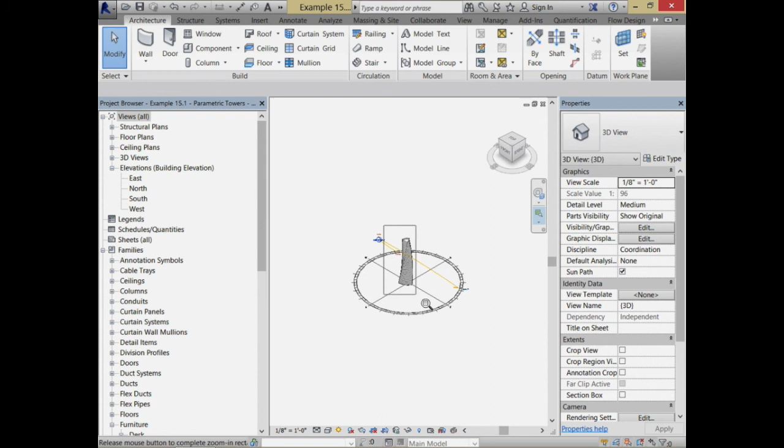So all I really have here is my big conceptual mass. This conceptual mass is divided into a whole series of mass floors. That won't be critical for what we're about to do, but how we did that was just kind of bring in the conceptual mass. We have a whole bunch of different floor levels assigned, and in that conceptual mass, go back over there again.

We've chosen it and just said, let's go ahead and break it into mass floors, where we've checked all the different floor levels. The reason I like to check all the different floor levels is that even if the tower is not as high as the floor levels, if the tower grows to be that high, those new floors will be added automatically. So I could have 160 of them in here, or something like that. Many of them would have an area of 0, but checking them all off allows that if the tower grows or shrinks, it'll go through and have the appropriate number of floor levels.

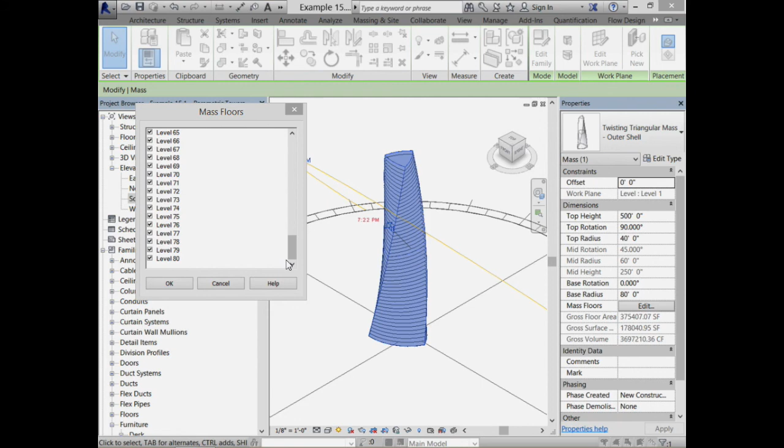Okay, so far we just have this tower, nothing too special going on there. Let's go ahead and just take a look at it. Now, as we were looking at this tower, there were a couple of surfaces that were very interesting to us.

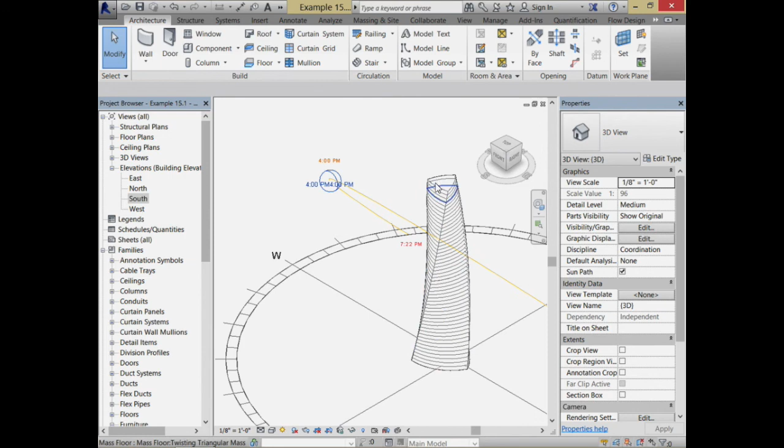There were these, what I considered to be the outer faces of the tower. So let me see if I can grab it here. I'm tabbing, let's see if I can do it down here. That's so sad, I'm getting all of the mass floors. I can grab it on the side.

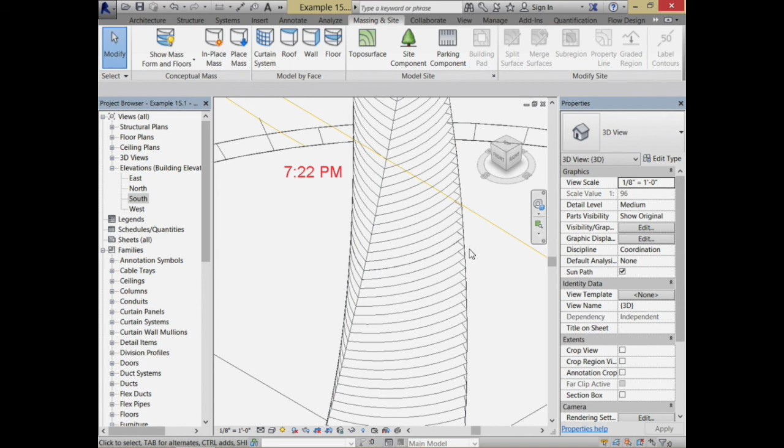Making sure it's all turned on. I don't think it is. That should be okay there, it's still there. Might have to open it to grab the individual face. Anyway, I want to grab those faces, the front face, the side face. There's 3 of them around the outside.

Okay, so here's what we're going to do. We're going to go through and open up Dynamo and take a look at the way we did it last time, and we will do it a little bit differently.

If you can, please open up in the Dynamo examples, go to session 15, and within there, grab example 15.1. We'll take a look at that. I'm going to go for the start, we'll kind of build this up organically.

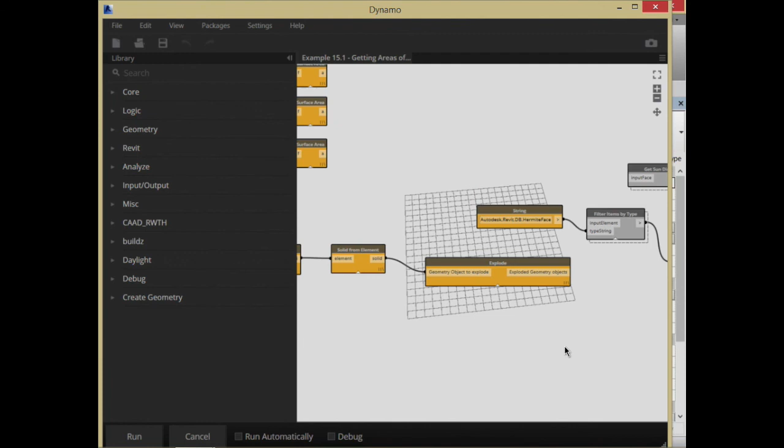Kind of push that over, push that over a little bit so you can see it all on the screen. Drag that over. Okay, so we have this whole notion of really choosing these individual faces, face 1, 2, and 3.

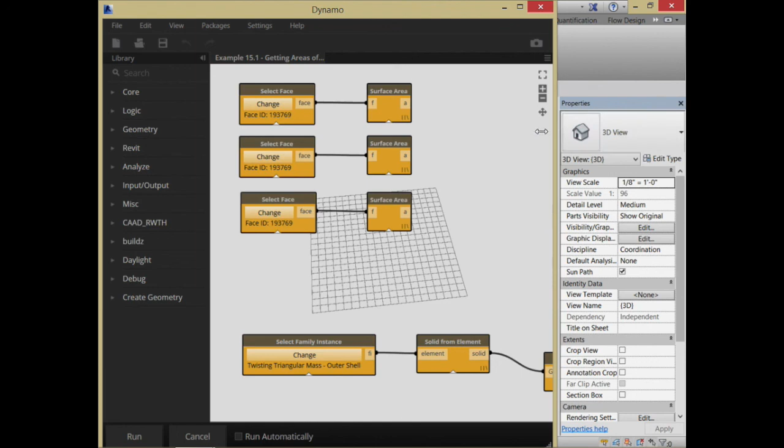Notice it gives you the same face ID, it actually is the 3 separate faces. I kind of think of it as a bug, because I would like those to actually be 3 different numbers. But let me push that over and see if we can show you what I did. What I did was I chose to change the face.

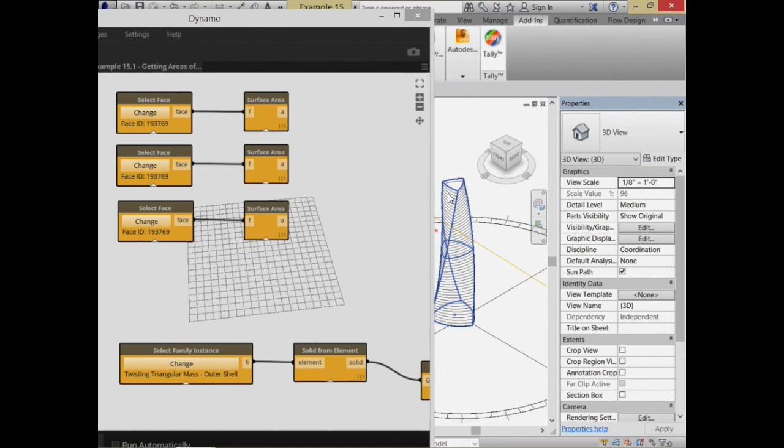That's not what I want to do. Let me change the face. I'm going to grab that front face. Change this face, I'll grab that one. Change that face, I'll grab the one behind us.

Those actually have about the same surface area right now because this is a very regular tower. But if it was something a little bit different, it would hopefully be 3 different areas.

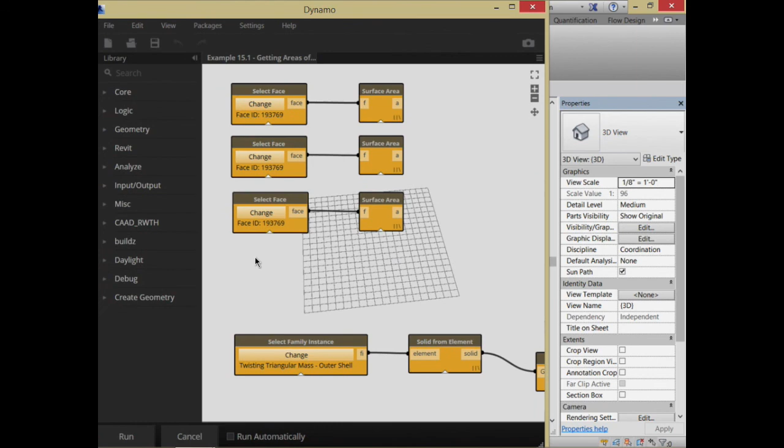In terms of running some very basic analysis on this, there's actually a surface area function, and it can report the surface area on an individual face. There's about 53,757 square feet on each of those different faces, and right now they're all even. There's not a whole lot of difference there.

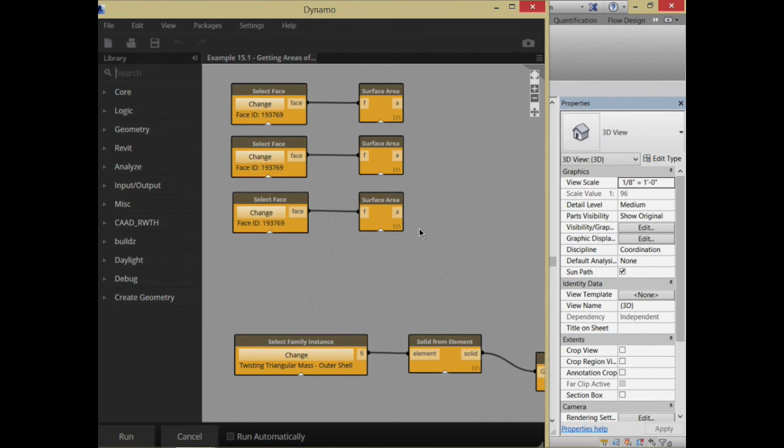What I want to think about is can I go through and grab those faces, those 3 faces or 4 faces or as many faces as there are on the structure, using the same sort of scripting. So what I can do is set up a series of logic that looks something like this.

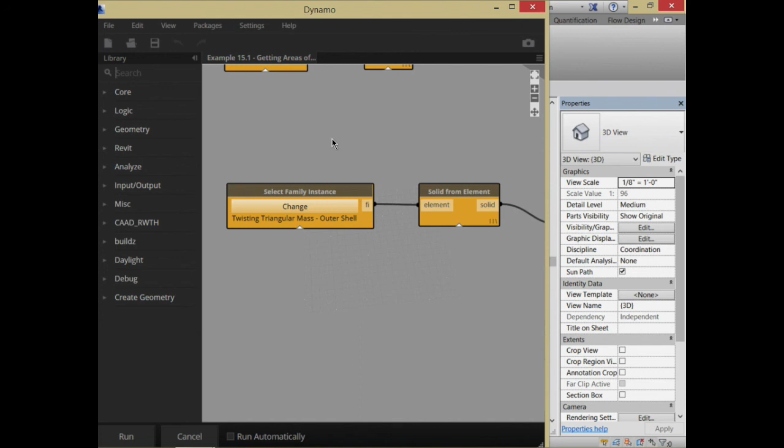It all starts with just selecting a family instance, and from that instance, that's a piece of Revit geometry. What we want to do is create a piece of solid geometry from that, something that's back in the Dynamo environment as opposed to the Revit environment. So we're going to take that family instance and convert it into what's considered a Revit or Dynamo solid, a geometric solid. And from that, go ahead and pull out some faces.

Let's just see what this looks like. As we choose that triangular mass, the result of the solid from element is just a solid representing that piece of geometry.

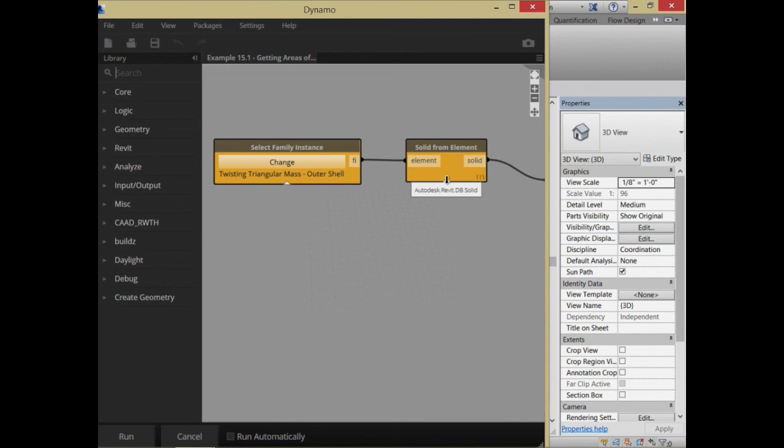We could actually use a function called explode. Explode is all about just basically taking some sort of geometry object and exploding it. If you give it a solid, it'll explode it into a series of faces. If you give it a list of faces, it'll give you the edges around that face. So it's kind of a useful decomposition node.

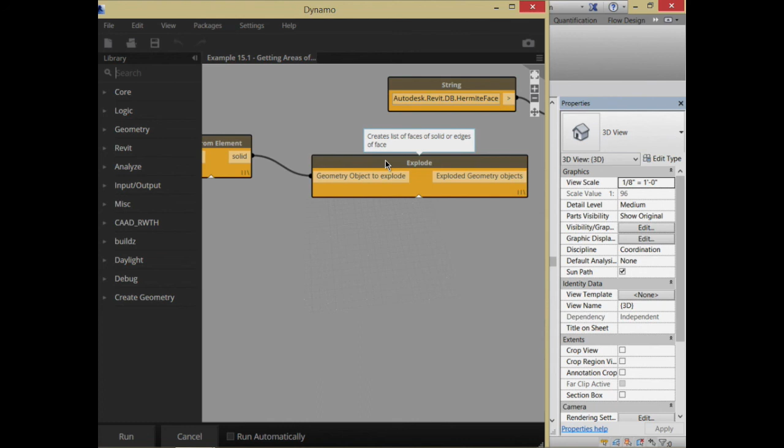So what it'll do is, if we feed it that solid, you'll see that it gives us a series of different faces here. Let's see what it gives us: there is a planar face, a Hermite face, a Hermite face, a planar face, and a Hermite face.

The planar faces are the top and bottom - those are things that don't have any curvature to them. The Hermite faces are the ones that are actually formed in that curvaceous kind of structure.

For me, it's going to be fairly easy using this specific object to go through and isolate which are the sides versus which are the top and bottom. If I had another structure that was all planar faces, it would be a little harder to figure out really what is the top and the bottom - we might have to do something else to filter those out.

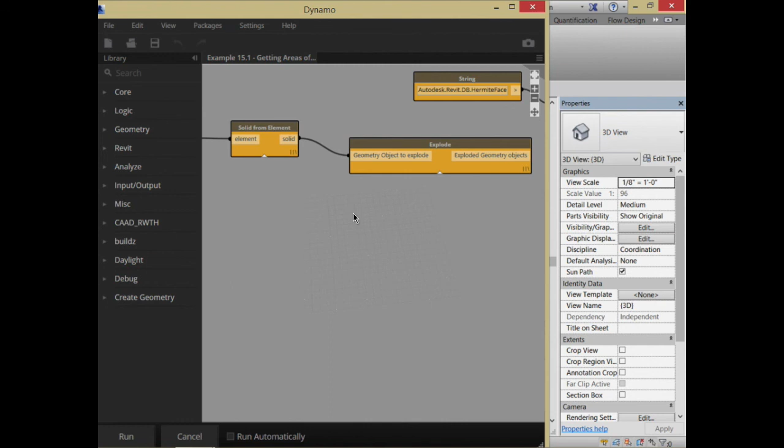The idea is, what we'd love to do is take this list of 5 different objects here, and go through and filter it down so only the Hermite faces are considered - so take 5, get it down to 3. That's really the next step in all this.

We have some things that we would like to filter, and we could use something called the filter in function. Filter in says we're going to have a function that goes through and sets some criteria, and if it's true, it'll include it. Filter out would be, if it's true, knock it out of the list. There's actually one where filter, whether true or false, will make you 2 different lists - the list if true and the list if false. So you can use filtering to basically, based on a criteria, include, exclude, or divide. That's what the filter in function is all about.

Now the filter in function really takes just a whole sequence of different objects that you're going to give it to take a look at. And then it looks for something it calls a predicate, which is really just a function which is always going to evaluate to true or false. Let's take a look at that.

We'll grab this, take those geometry objects, all 5 of those, and bring those in to filter them in. In terms of what the predicate looks like, let's take a look at this function. We have different sorts of functions we can set up to filter by whatever we want. In this case, I want to filter just by the type of object - I want to get the planar faces versus the Hermite faces. So filter items by type is a custom node. Let's take a look at it.

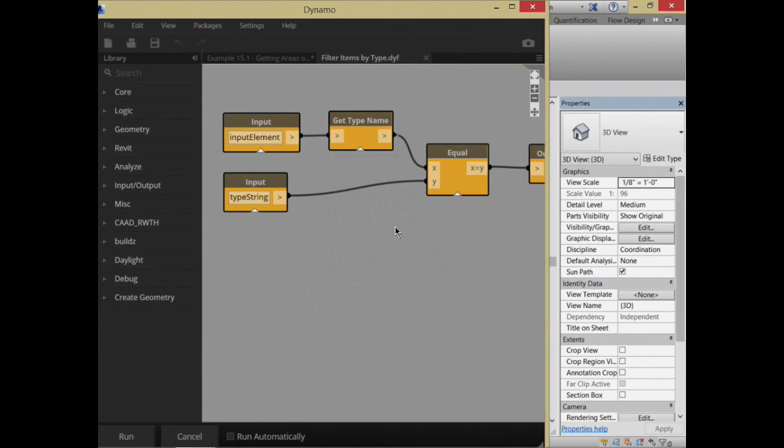Now, before we let it go, let me take a look at this Get Type Name node. You might wonder about that. That's a custom node too, actually a node that's defined in Python.

So for any of you who are Python programmers out there and like working with Python, this is really where it all opens up to you in terms of being able to access any data to anything that's actually in the Revit database underneath us all. The script behind all this looks like this - it's just taking whatever we're giving it and then getting the type.

Getting the type is something that's in the Revit API. There's a function that, for anything you give it, you can say get type and it'll return the type, just a string representing that. So we're getting that, casting it into a string, and putting that as the output. A very simple Python script that, for anything you give it, will return the type.

So it'll return whether it's a Hermite spline, or whether it's a piece of furniture, or a wall, or a window, or whatever it is. This will just grab anything you feed it and ultimately return that type. That's all it's really doing.

Okay, just the barest beginning of a hint though of the Python scripting behind this, because there really is a whole scripting language and a whole API available. Just about anything in Revit is ultimately available through Python, and you incorporate it into your scripting through these nodes, which just have inputs and outputs. In this case, the 'in' is the input value, the 'out' is what's coming back out.

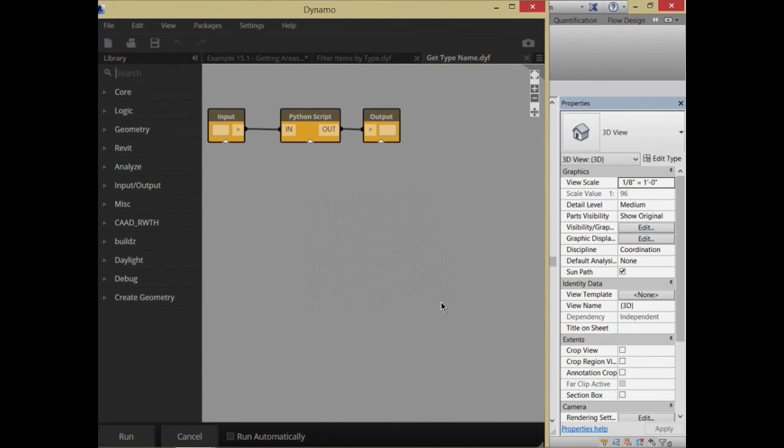Okay, but incredibly powerful. So what Filter Items By Type is going to do is it's going to take, using this filter, like a mapping function, all these different items here and say, hey, for each of these different items, is your type equal to a Hermite face? If it's true, you're coming through. If it's planar, false, you're not coming through.

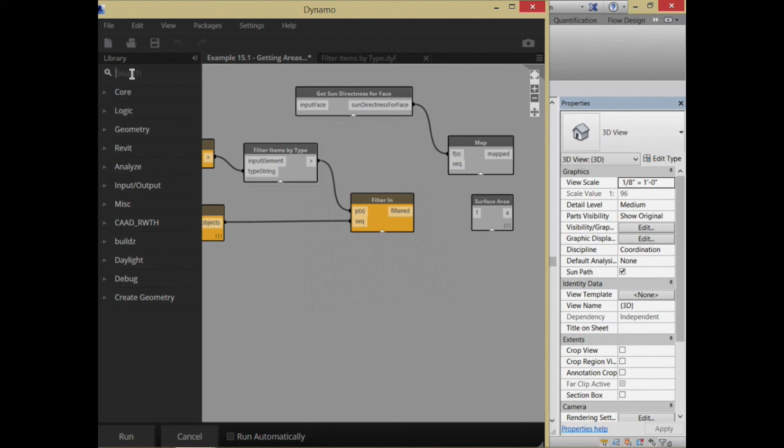So the result of all that - let me put a little watch on here - it's going to be my filtered list. So all the Hermite faces came through. Again, that would work just the same if I changed it all over here to the planar faces - I get those two faces instead.

Okay, let me check in with you in terms of filtering. Sounds interesting, sounds useful, potentially confusing. Think about how we can use that.

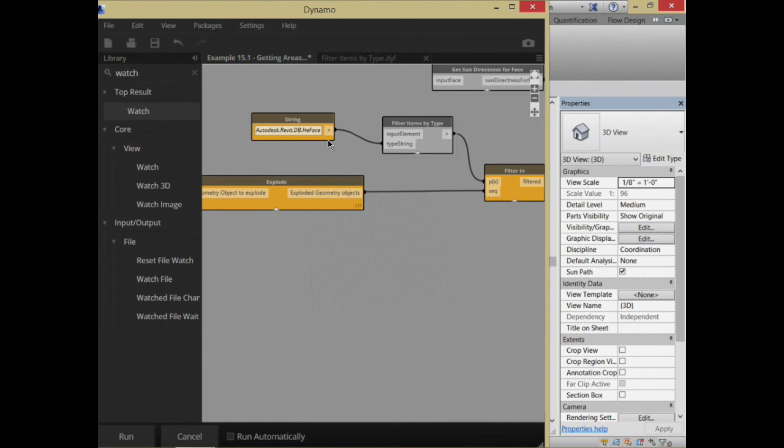So again, just grabbing all those different faces. Now, the example I'm going to use here is going to be fairly easy because I'm just going to grab these Hermite faces, but we'll try this again with some rectangular objects, see if we can figure out how to make it work for that too. It'll be a little bit different. But once I have those different faces, let's take a look at what we can do.

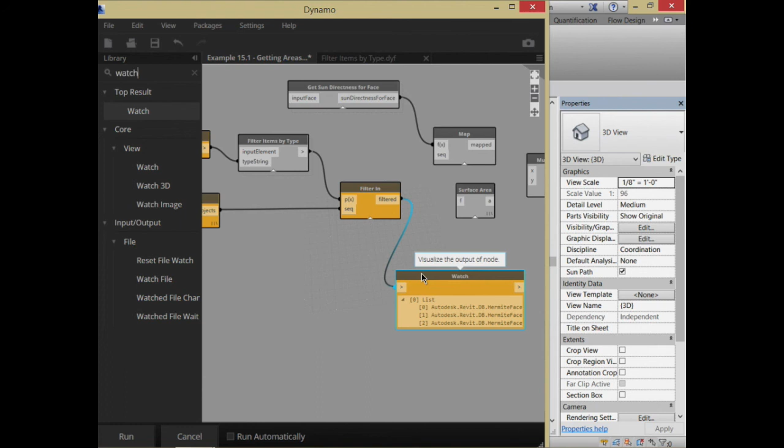I got faces 1, 2, and 3. Once I filter them in, I know the faces that I want to consider. I can then go through and compute the values for those different faces. One value we might want to consider is the sun directness for each of those faces - that we've been doing, we know how to do that, we've been playing around with that one for quite a bit.

So what I can do is just take all those filtered items and feed them to that function. That's going to now return a bunch of values for the directness value for each of those 3 different faces. I run that.

You'll see there's 3 different values there. The innovation suggested last time was that we don't just want to consider these average values for the directness on the different faces. We would love to actually go through and consider some weighting by the surface area of each of those different faces.

So the surface area function can allow us to do that. We'll go ahead and grab this same list and feed it to the surface areas, which will be very boring in this case because they're all the same surface area, but yours will look a little bit different probably.

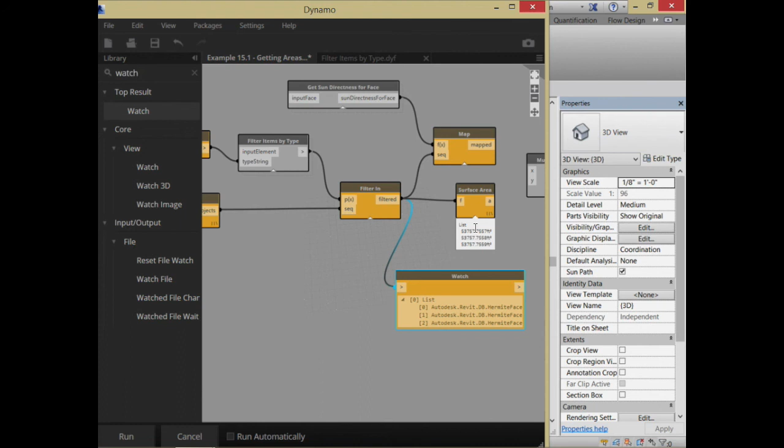And then what I can do is, if I want a weighted average, I can multiply those two things together and then maybe divide through—I don't know, we'll figure out what we want to do. So I'm going to grab those weightings and multiply them by the surface areas.

You'll see I get these 3 different values here. These are 3 different multiplied values of the sun directness by the area. So you'll see that third surface seems to have the most attraction to it right now. It has the best directness value, so it's scaled up the most, to almost 82,000 square feet.

Out of that, we can decide what we're going to do—whether we try to divide through to create some sort of average value for each surface, or go through and sum them all up. In this case, what I suggested was for the overall shape, just summing it up so I have the weighted value of each of the different surfaces, summing them all together so I have the desirability of all 3 surfaces added together.

We could all spend a lot of time figuring out the best metric to put those things together, but it's really whichever way you want to. So we're looking for something that would actually sum things together. I've got this list of 3 different items, and I would like to sum them all together.

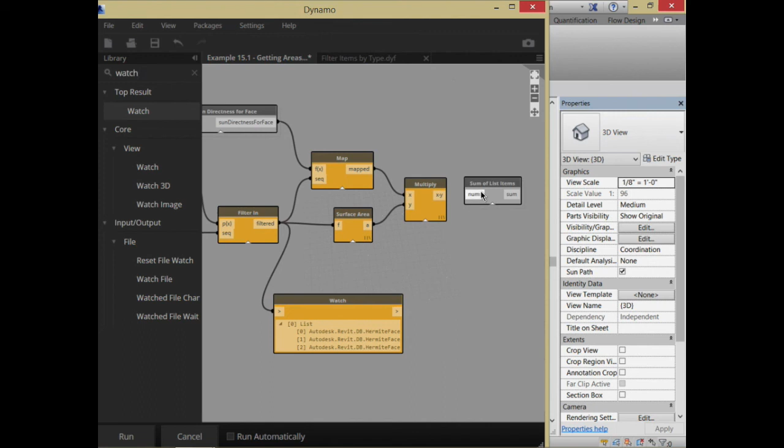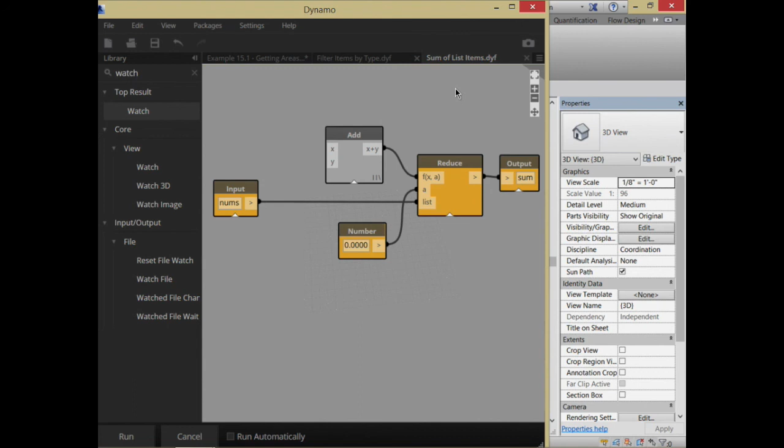In terms of how summing actually works, let me just open it up so you can see. Starting with 0, it's going to add whatever the new value is to that, and ultimately put out a single value for everything there. But I'm going to look at the Reduce function to find out exactly what it does. I sort of half understand what this is doing—it reduces a list to a new value by combining each element with accumulated results. That sort of makes sense; that sounds like a nice accumulator to me.

This is an example of there being a lot of custom nodes with functionality that's good to dig into so you can customize it as you need to. But for the most part, it's all about building a big library of these things that you can start drawing on and trusting in. So what I'm going to do is take all those different values—go ahead and run those again.

There we go. I have these three different values that are multiplied together, and if I want to sum them all up, let's run that one more time.

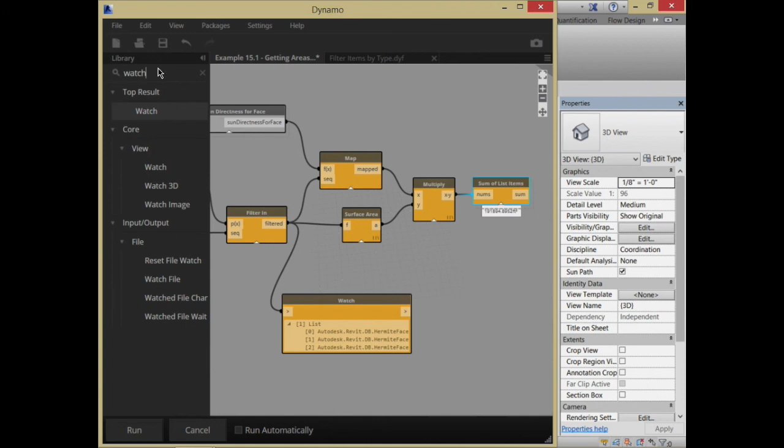That actually sounds like a good idea, let's take a look at that. Now, you guys are better on some of the math than some of this stuff, but let's take a look. So you were suggesting the cross product that would multiply A times B and then add them all together? Let's check it out. I'll buy that.

XYZ cross product, or which one? Do you have a cross product function or a Cartesian? The Cartesian product, I think of the cross product, but that's generally for a point. Do you have a function, or which one do you think, Hung?

You want something that acts like a cross product, right? Yeah, it's all those. In fact, this would be a good function in terms of just giving two different lists, multiplying and summing them all together. So if that function hasn't actually been created yet...

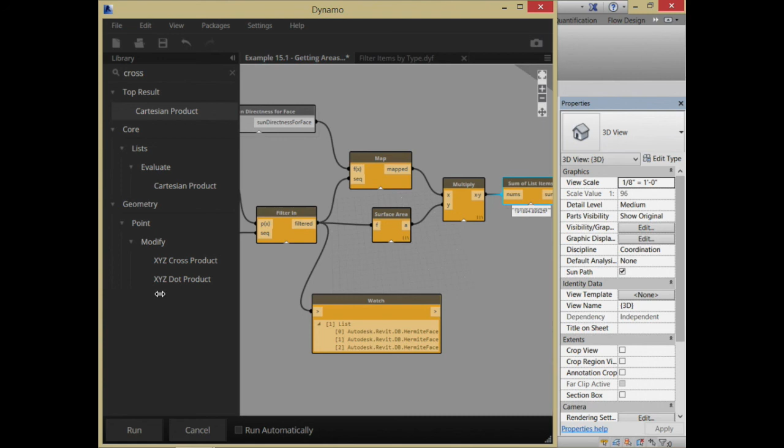What we can do, actually, let's see if we can do the surface area of that, mapping that. Let's see if we can make this work. You have a very specific item in mind. You'd love to go ahead and truly take those two things and make them a function.

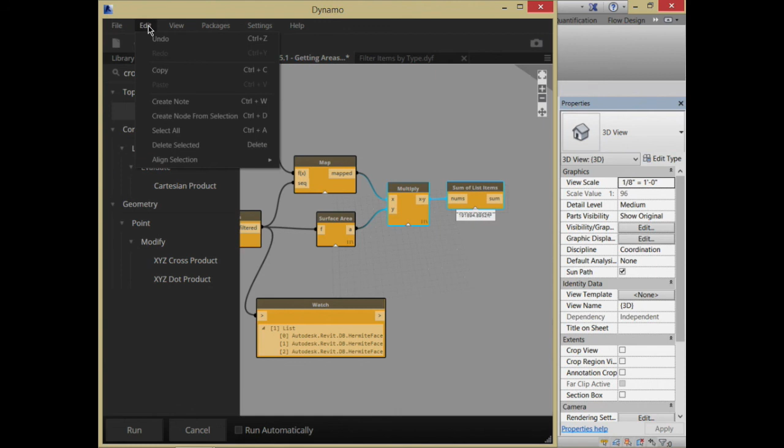Okay, no worries. That's something we're going to talk about later, but let's talk about it now because it's equally useful now. If I take those two different nodes, which seem to be doing something very useful to me, let me create a node from the selection.

Okay, I'll call this Hong's cross product. Because you're just that famous. So let's see how Hong's cross product works.

It takes two different inputs. It multiplies those two different inputs, and theoretically then gives us a list or sum of all those different items. So if I give it two lists that are equal in length, with some luck, this should work.

So over here again, if I run this, it's giving us the same value. So a very useful thing.

So now that we have Hong's cross product, we could share that freely amongst ourselves and start creating our own little collection of nodes. So if an XYZ cross product won't work, but just a cross product between different columns, super. So be thinking about that. That's actually a really useful way of sharing and ultimately increasing our power, just to continue to go through and create nodes like this.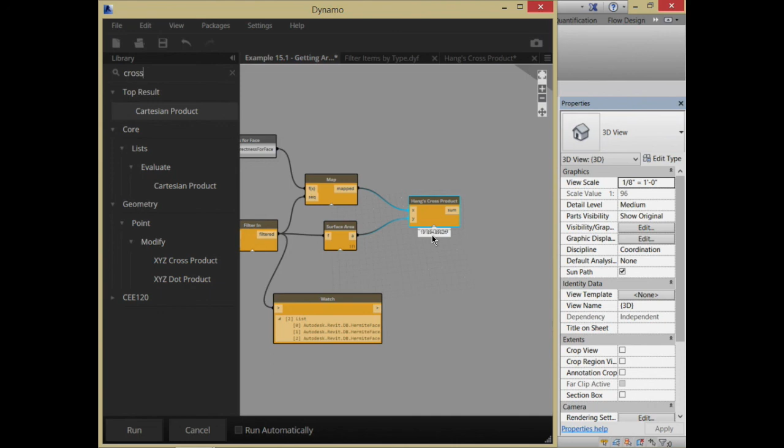Now, again, Hang's cross product right now is only on my machine at this point. Go ahead and save that away. I'll go ahead and put that in my session 15 examples.

Let's talk about the difference between where I can put these things. If I put them, let me cancel all this. If I say save, and I put them in the Dynamo core definitions, they're going to be available to me every time I open Dynamo. They're always going to be hanging around there as CEE 120 things down at the bottom. So it's a good place for things that I'm going to use a lot, is to put them down in my core definitions, because then they'll be in my installation.

The difference, though, or what you have to watch out for, is they'll be on the machine where you installed it. So if you're on this machine, it'll only be on this machine. For you, it'll be on your laptop, so you'll carry it around. So what I tend to do is the inefficient thing, which is I store them in the folder with the example, only because that gets transported around when you grab the example, as opposed to doing it there.

But a better strategy in the long run would be either to go ahead and put it in your core definitions, or even better, if this is kind of a useful thing, and this actually sounds like a useful thing, Hang can publish this. So you can put it out there in the community, other people can download it, and they can install it in their system too. Okay, so be thinking about that.

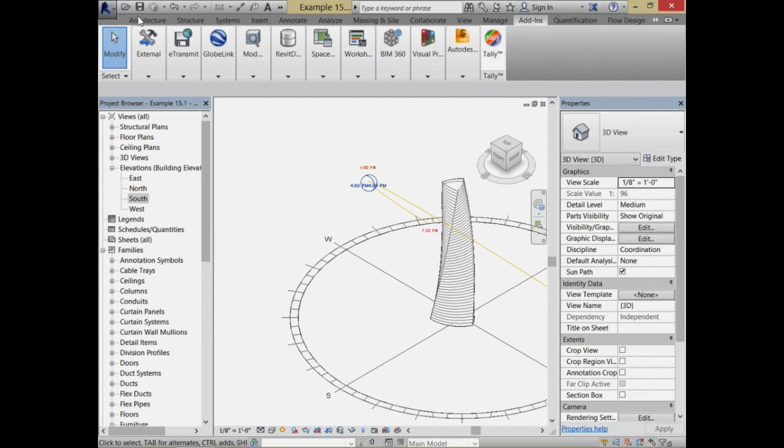So this was actually pretty straightforward. What worked for us in this case was that this shape has such an unusual profile that it was relatively easy to figure out which were the faces of interest. Let's approach that a little differently. Let me try it with a slightly different model and see if we can still make sense of it.

In that same sense, let's go ahead. We could do that with a rectangle, or we can do it with a box. Let's see what other interesting things I have in terms of some nice conceptual masses, or I can make one. Doesn't look like I have very many masses in here, so I'll just make one.

I'm going to make a little in-place mass, on level 1.

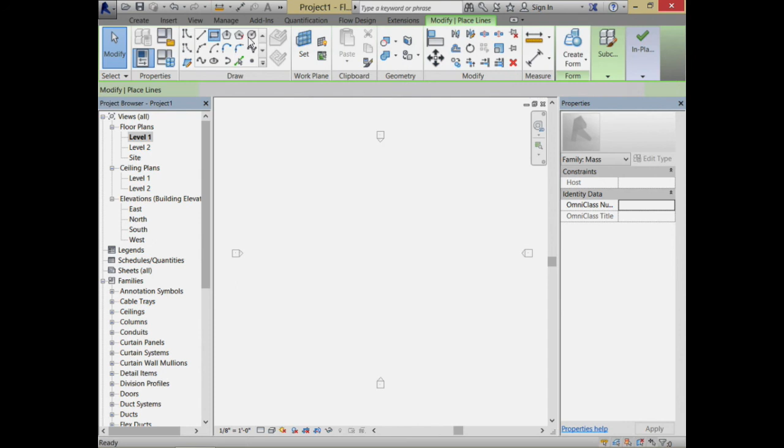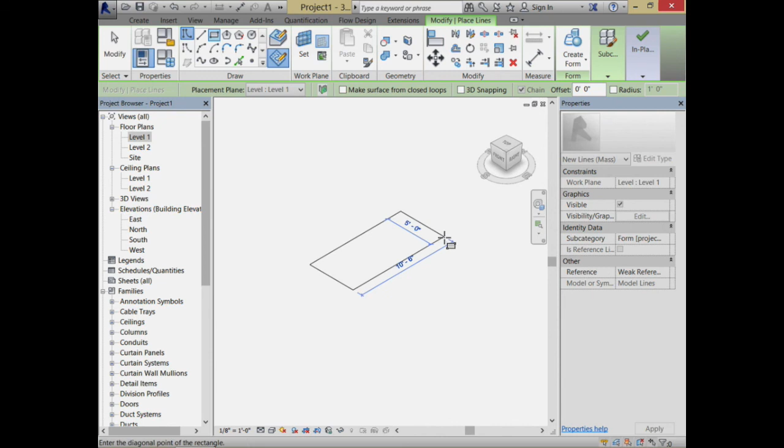I'm looking at that, wondering why it won't let me draw it there. Let's switch it back over to 3D. Line is too short - that sounds very strange. Draw on the work plane. Oh, I think my cursor's a little odd. I'm going to make a little form out of that.

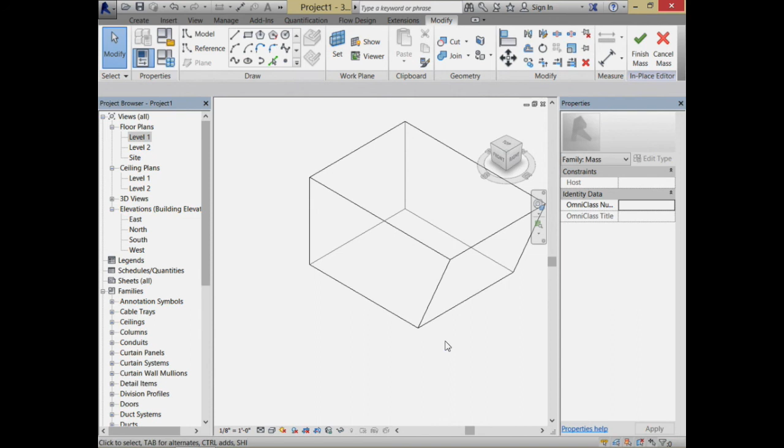At this point, what can you tell me about my faces? Yeah, I have a bunch of faces in there. Do you think they're all planar at this point? I think they're still all planar. It's really not till I add just a little bit of torque to it that it makes one of these Hermite faces.

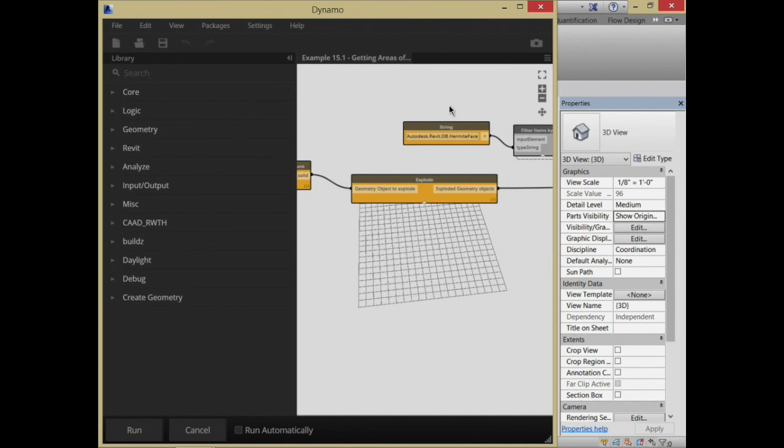So let's take a look at it this way first. Again, I'll open up my add-in. Let's see what I got here. 15.1. I'll do the end - actually, I'll do that one, that's the one we built. So in the same sense, I can go through and select a family instance. Okay, I've got that mass one. Let's run this and take a look at it.

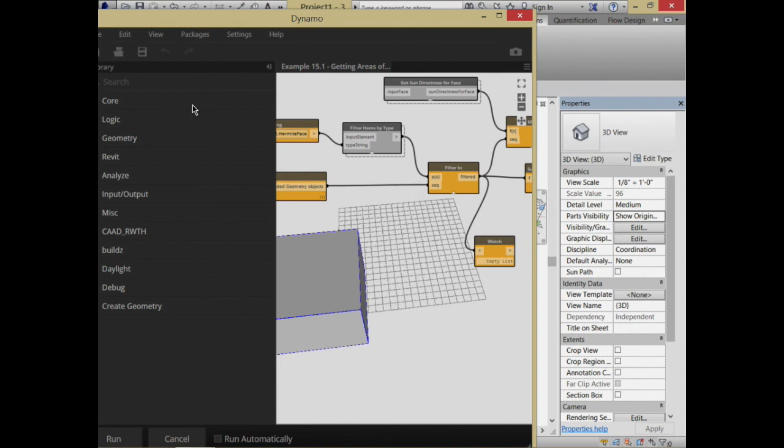Okay, in terms of what we actually created out of all this, it says my list is empty right now, and that's because in my exploded faces - let me bring it over here - I have a bunch of planar faces. So since they're all planar faces, filtering on Hermite faces isn't doing it for me. I'd have to filter by planar faces. But I may need something else to really figure out the faces I want to consider.

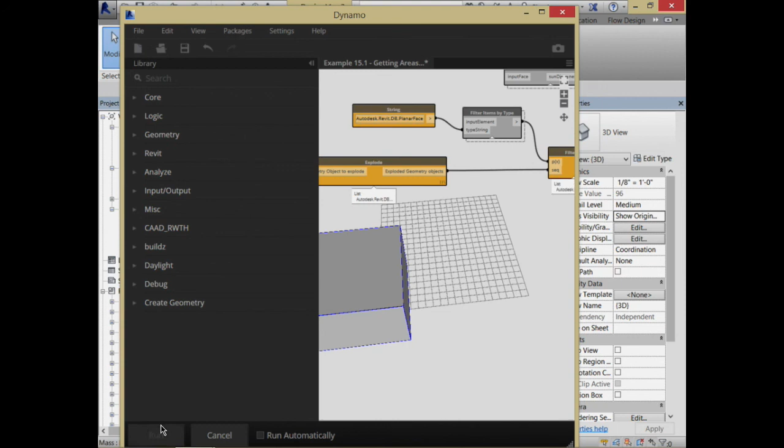Okay, rerunning that, I get a whole lot more faces. The problem is now I'm also considering that roof and that floor. So what can we say about them? We have a little selection problem - we have to figure out a way to get rid of them one way or another, making sure they're not considered. We can go through and look at the surface area of all of them and say something about whether it's less than a certain value. We need some other criteria to help us figure out really what it is that would allow us to filter those.

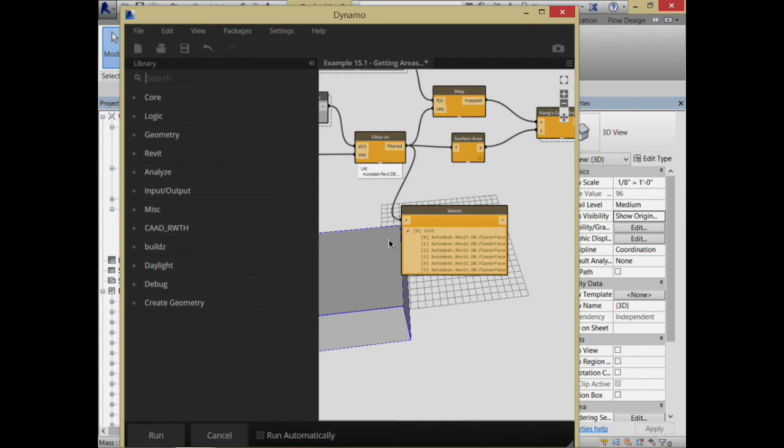So any suggestions? We're heading off into different territory now. If you look at all those different faces, is there any way we can distinguish that top versus the bottom?

We could go ahead and compute surface normals off them or something like that and figure out whether it's going straight up or straight down, and try to filter based on that. Let's just think about it, because this is really - that's the danger of going this non-explicit route - we actually do need some criteria for filtering in and filtering out. So we have to think about how we can distinguish that, whether it's by area.

The truest thing would be to look at some sort of surface normal to each of these different planes, and from that say that if it's going straight up in Z or straight down in Z, that would indicate that it's a floor or a roof, as opposed to a wall.

That's an interesting one, because then you can just do it by the name of it. My understanding is I can do all that - I got that surface there, that's comments and mark for that. I don't know if I can actually give it that. You'd like to almost just encode in the Revit model somehow, like some distinction, whether that's a wall, a floor, or a roof. And actually, you're onto something there.

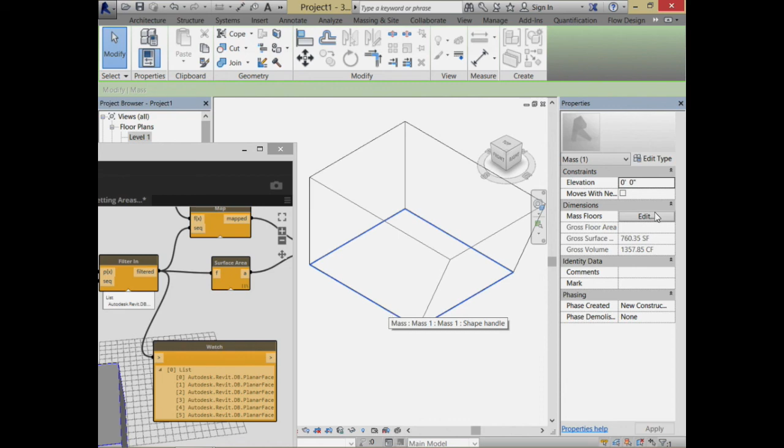Let's try editing that one in the same sort of way. That's still there—it's really for the whole type, because then it's all. That roof is considered for the whole type. I want something that's just going to be for the instance.

I don't know, I'll have to work on it. Not sure what it is offhand. We'll figure it out—there's got to be some way that we can go through and distinguish that. But if all else fails, we'll go for something like the surface normals.

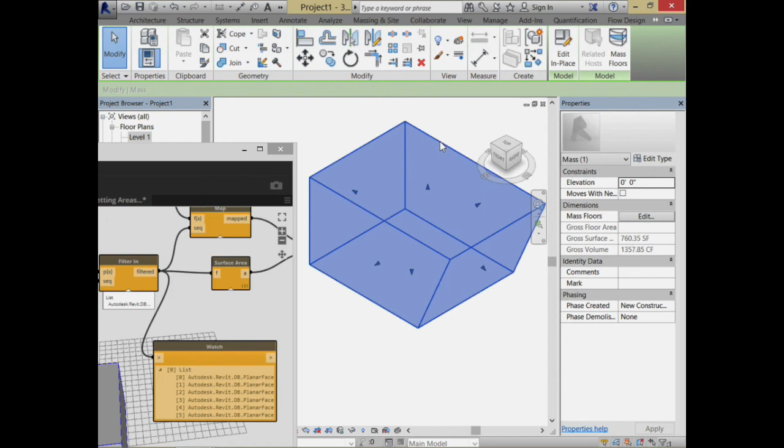Okay, let's shift gears a little bit, because we can grab all these multiple areas and work with them to compute some rating. That's looking pretty good. Let's look at this issue—the surface areas are kind of cool. How can we address this notion that there are other values we'd like to get, volumes and floor areas? That's all kind of cool, but there's other interesting stuff we'd like to be able to tabulate too.

For that, let's take a look at this example. What we'd like to do is compute what I'll call the exterior wall floor area. To do that, I'm interested in this notion that there are some things up against the exterior surface, and some things toward the core of the building, and I needed a way to compute the floor area of that difference. So it's kind of tricky how you might approach that.

Here's one way you could approach it. What I actually did was come up with a model that would reflect that area—the difference between that outer surface and some inner layer, whether it's 12 feet, 15 feet, or whatever distance you want. So I created two different masses, one called the outer shell and one called the inner shell. Then, using those two things, I cut the inner shell out of the outer shell, and what was left over—that donut-shaped structure—was actually the exterior wall floor area.

That's something we can start tabulating. In terms of getting the floor area, we can go ahead and grab all of the different mass floors, grab the floor area from all of them, and ultimately just add them all up. So we can go through, filter, and then summarize them.

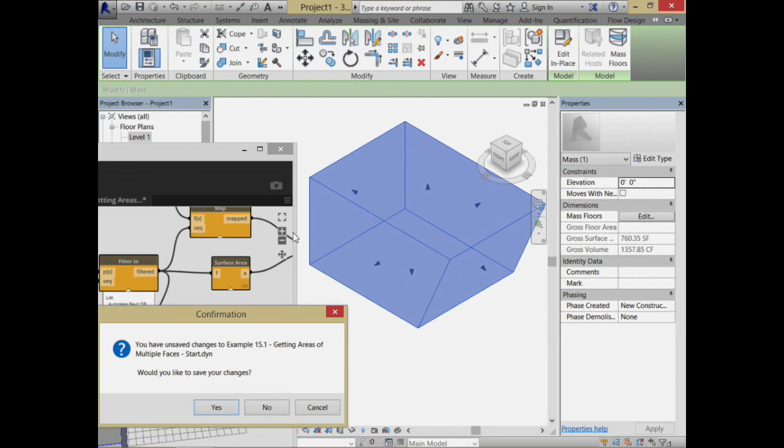Let's see how that's actually implemented. Let me pop out of there and open up instead 15.2, and we'll take a look at that one. Let's zoom on in there and show you what we have.

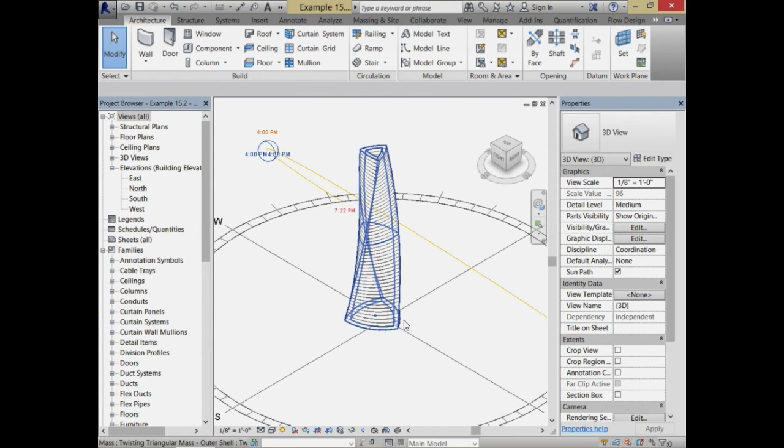So here's the deal: we have two different towers there—an inner tower and an outer tower. Let's talk about how we actually created those, because it wasn't too bad. Let me look at it from the top. What we started with was going through and creating the outer tower. So if I do this twisting triangular shape, I'll see the outer shell. Let me drag it in there—I'm just going to put another one in so you can see what I did.

Okay, so that's the outer shell right now. Now I want to have one that's the same, just the inner shell. And it turns out the inner and outer, it's really the same shell - it just has different dimensions for the radiuses.

So if you remember on this shape, the two most critical values, if we keep the rotation the same, are the top radius and the base radius, because the middle radius we've actually just set up to be the average of those two - evenly split between them so it has an even taper.

So if I want to create an inner shell, what I can do is almost just duplicate this thing. Once I've duplicated it, I can give it a top radius and base radius that are smaller, and that'll sort of core it out.

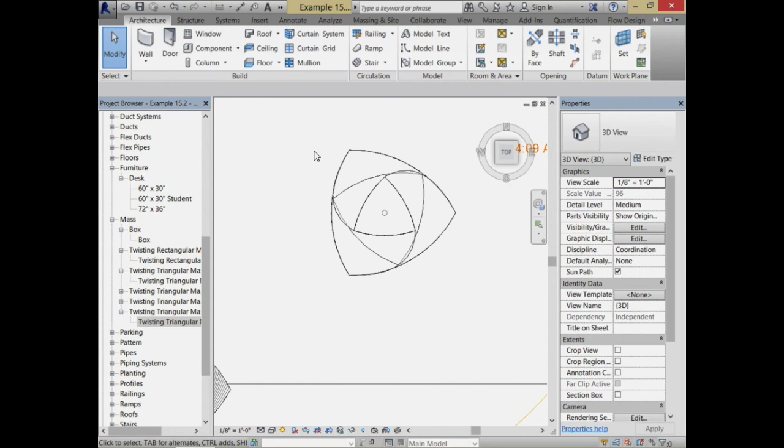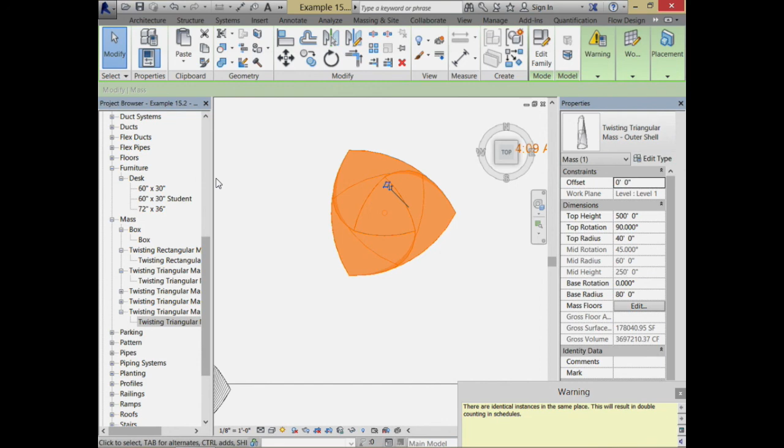So let's see how you can do that. A couple different ways - I could drag in another one and place it carefully. This is a case where I like to copy and paste something right on top of itself. It'll complain because it thinks putting things exactly coplanar, with the insertion point exactly on top of each other, means you're probably making a mistake. But we're going to accept that warning for now, just as an in-between spot.

Now I can grab one - it doesn't really matter whether I'm grabbing the inner or the outer at this point, since they're both labeled outer shell. Either one will work.

What I want to do is take one and reduce the top radius from 40 to - let's say if we consider the boundary of interesting space from the outer windows in, if it was about the size of this room - 2, 3, 4, 5, 6, 7, 8, 9, 10 - it's about 20 feet, something like that.

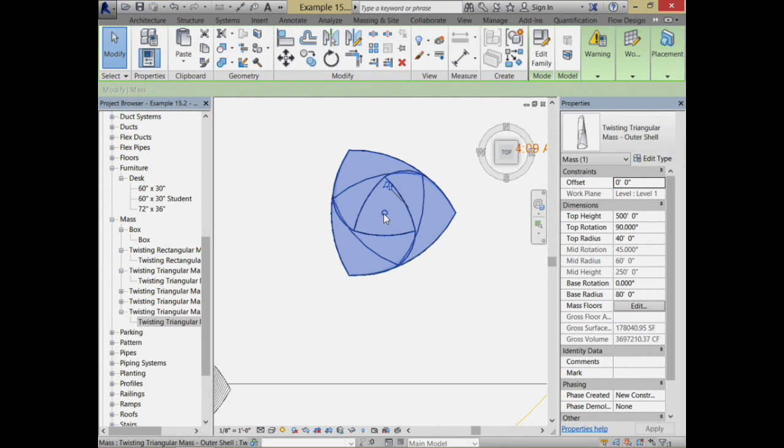So if I reduce the top radius to about 20, then I also reduce the base radius by 20 feet to about 60.

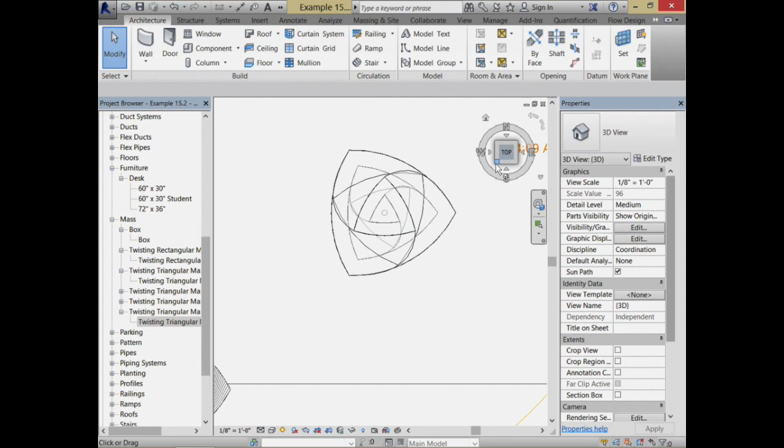What I actually have now is two different structures. Let me pop that back up into 3D so you can see it, and I'll rotate that over so you can see my work a little bit better.

So you'll see I have the inner and the outer. If I want to compute the difference, I need to cut one away from the other. I could go ahead and always be computing the value for the inner and the outer, then subtract them - either way it works about the same, depending on whichever way you prefer.

I could get floor area values for the outside and inside and just subtract them - that's one way to do it. Or I can go through and do it on a mass floor basis. It really just depends on how you want to use the information.

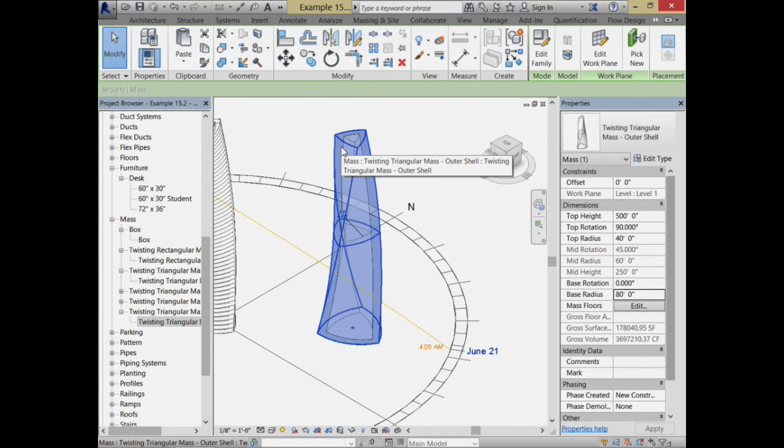You'll see that for this, actually there's no mass floor area right now because we haven't divided into mass floors yet. I'll go the way of coring it out like a donut - but again, this could work a number of different ways.

So if I have an inner and an outer and want to core it out, what I need to do is use the cut function. The cut function, if you've chosen anything, hangs around right up there under the Modify tab - we can cut some geometry.

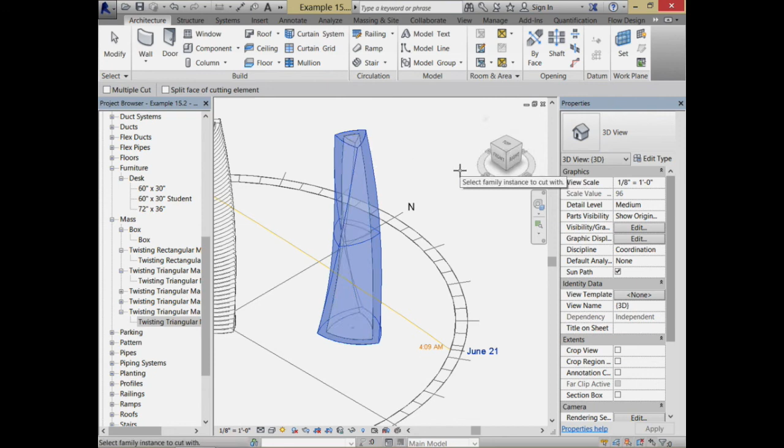When you cut geometry, you either select the first element to be cut, or the host. I'm going to choose the outer element because that's the one I'm going to cut. Then what I want to cut with is the inner element. Okay, and now, with any luck, we have this little donut.

That's hollow in the center.

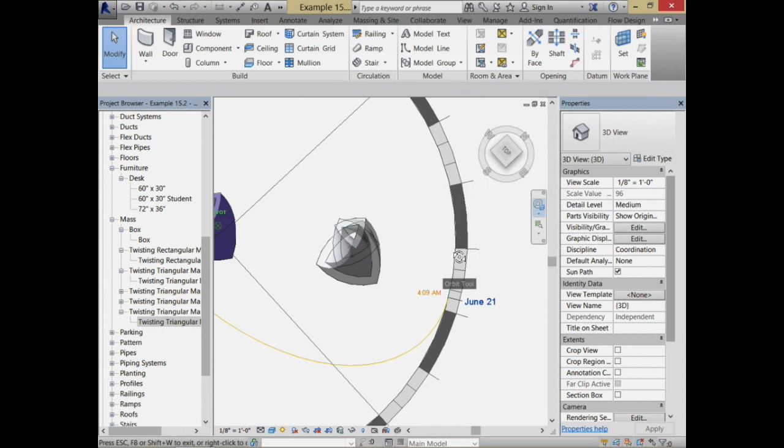Now, as we go working, if we rotate and twist, we're going to have to remember to actually twist both different objects, because we have to have the inner and the outer kind of twisting together. We could try and set up some parameters to link those together more integrally.

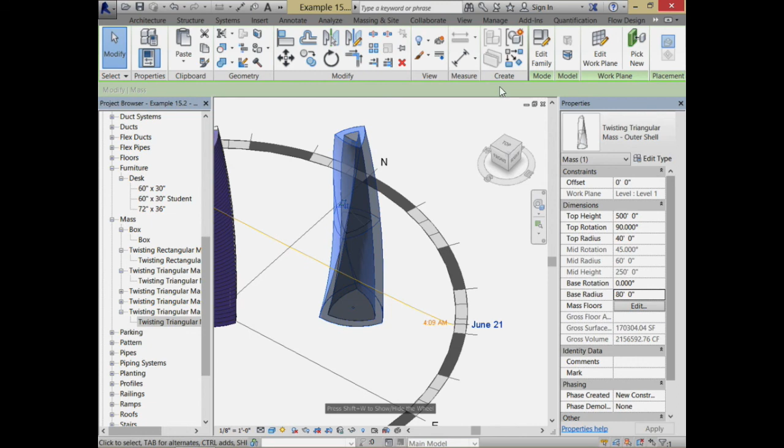But now if I want to compute that floor area, what I can do is just grab that guy. Let's go ahead and grab all the different floor areas, all different levels, and turn them all on. Even though I don't have 80 floors, it'll compute a whole series of different mass floors.

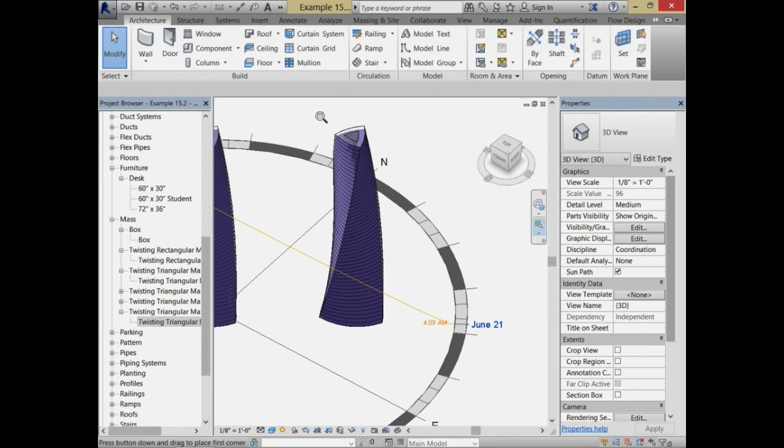Now, when I did all this series of mass floors, what I'm going to do now is basically think about tabulating all these different areas. The reason I'm going to go after that is that it gives me a little more control.

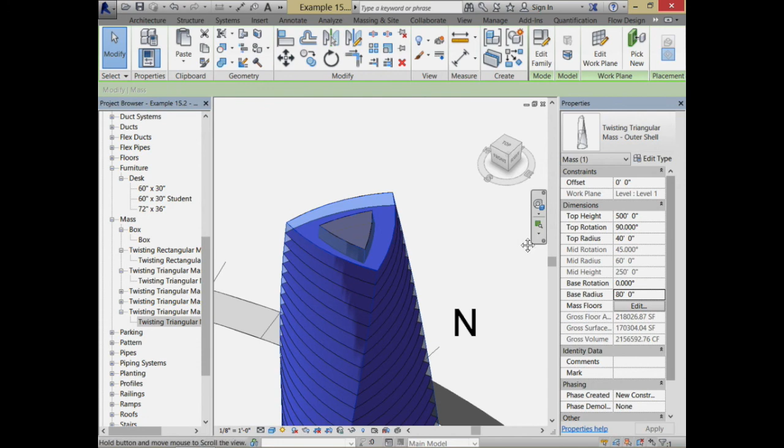You'll see that actually if I just choose the outer surface, it does give you a gross floor area, 218,000 plus or minus square feet. And that's really treating all the floors perfectly equally in terms of what's going on.

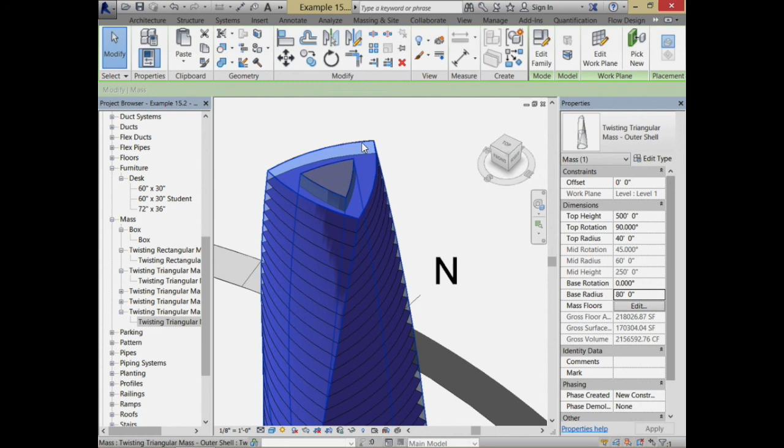The reason you might want to go after the mass floors and do them separately is it starts giving you the ability to consider different mass floors in different ways about whether you want to include them or not. So for the surfaces, could we go through and put a name on them, some sort of distinction that would help us sort out one type from another? For mass floors, I think we have a little more control in terms of doing that.

Let's think about this. We could go ahead and put in comments, or put in a value in here for the mass floors, so that we actually have some ability to distinguish them. For example, if this one over here is going to be considered like a utility space, that has utility, that one doesn't.

We have a way of starting to distinguish between them all. There's going to be another utility floor down in here. I can spell, right?

This will give us, as we're tabulating, a way to do some sub-distinctions between all the different floors versus being able to say some of the floors have a functionality and tabulate them a little bit differently. So let's think about how you can actually go through and use this.

We've got a whole bunch of mass floors. We'd like to add them all up and get the surface area based on some criteria. Let's see what we can come up with. We will go to the add-ins.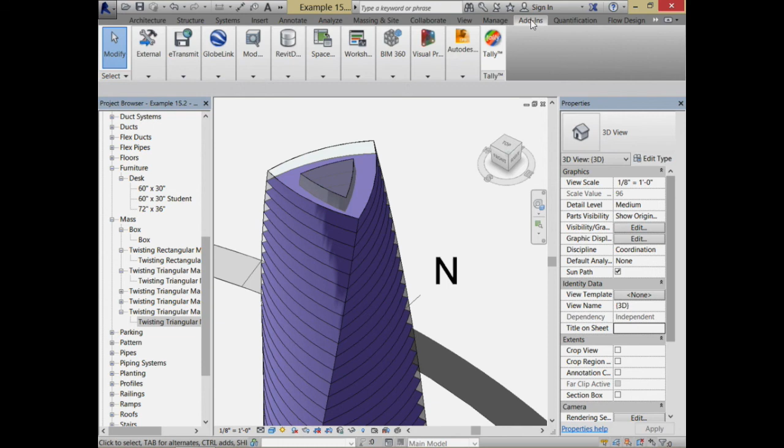Let's take a look in there. Let's open 15.2. And I will go for the starting point one. Here's how it basically works. Let me zoom that in for you a little bit.

We basically are going to say, hey, we want to grab all the elements in our model of a specific category, and you have to tell it which category. So there's a big list of standard categories in here, like adaptive points, analytical nodes. These are all the different Revit categories. You might recognize a lot of these things show up in visibility graphics. It's just different categories of objects.

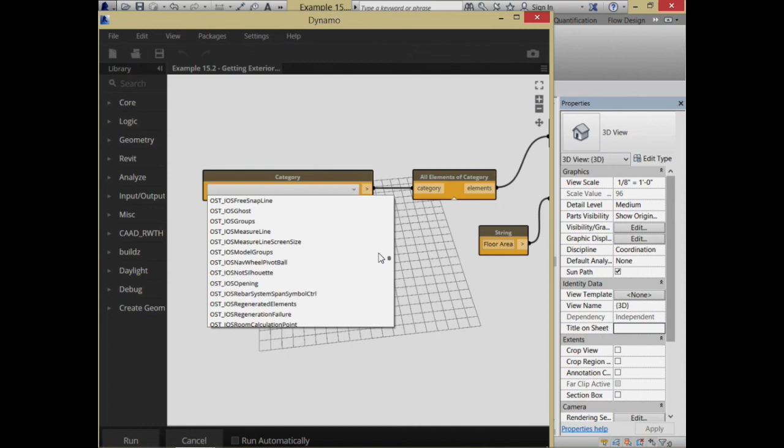So we're going to go for the mass floors. We're going to say, select all the elements of the category mass floor. That's not so bad. When I run this, you'll see it's going to give you a whole lot of mass floors.

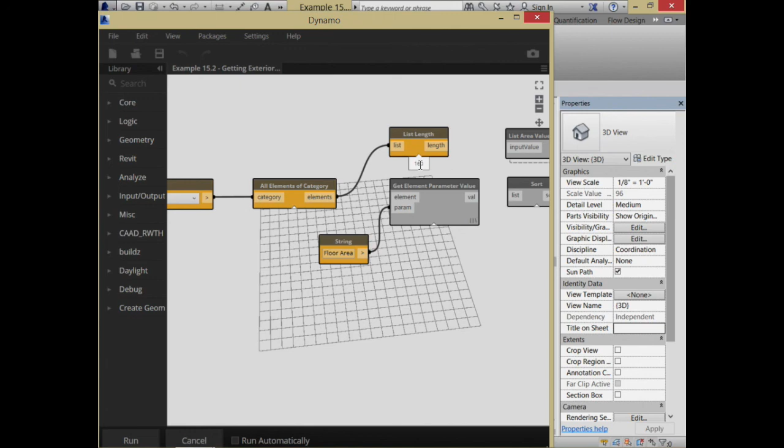Right now there's about 160 in there. The reason there's 160 in there is because I actually have those two different towers. I have the one and I have the second one that I kind of created off to the side there. Let me go ahead and get rid of one of them just to make it a little bit easier.

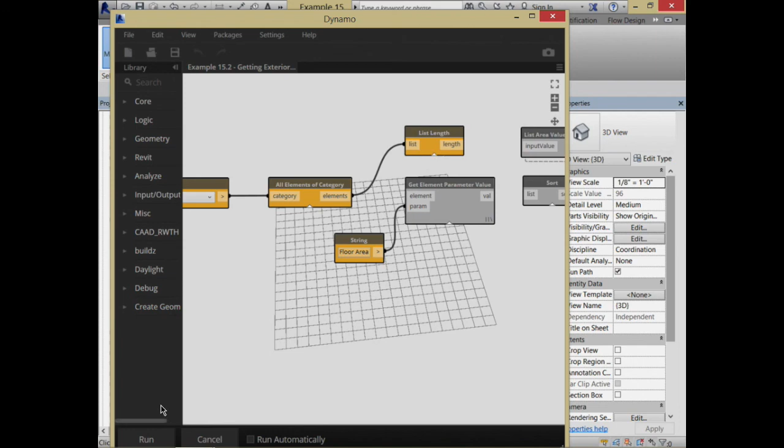I'll get rid of this one over here. So if I rerun that again, hopefully there should only be about 80 of them. Why are there still 160? I'm going to think about why that is in a second, because I don't think there should be. It's going to make me wonder for just a minute about why it still has the 160 in there, because I think there should only be 80 in there. Oh well, we'll get to that in a second.

Once I go through and grab that big list of all the different elements, I want to grab some sort of area out of there, or data out of there. And for all those mass floors, we can look at what kind of parameters they have available that contain interesting data for us.

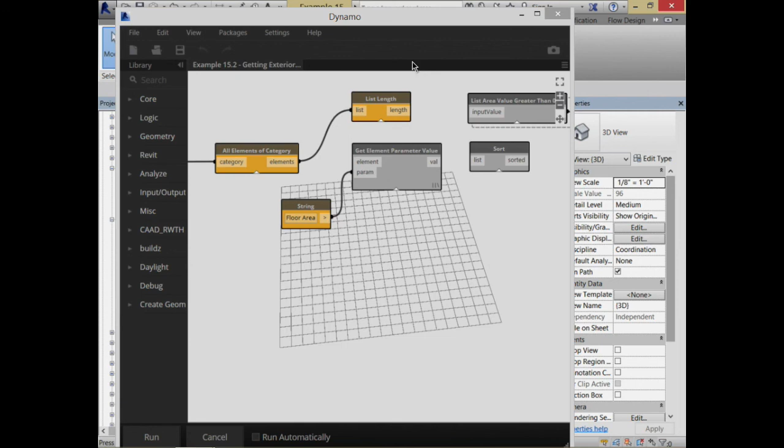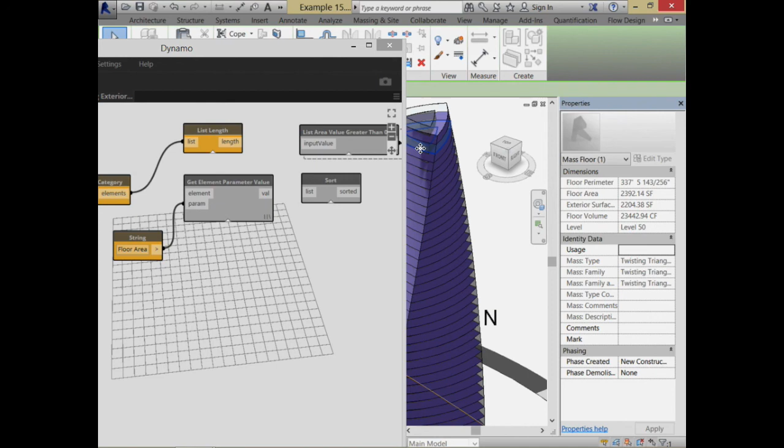So for each of those different mass floors, one of the different areas or values that's interesting to me is floor area. Got floor perimeter, exterior surface, floor volume. Let me go for just the floor area. So what I'm doing is just grabbing all those values for floor area, taking all those elements and saying, get that parameter for each of them.

We'll go through and run that. What's it doing now? It's just here to bother me in terms of, hang on, we're going to reconnect some of these things. It's recognizing now that there are some things that got deleted from the database. Let's see if we can kind of straighten this out in its brain.

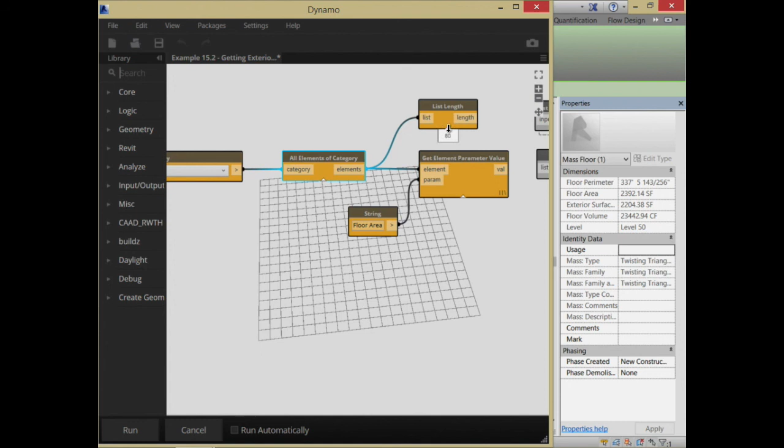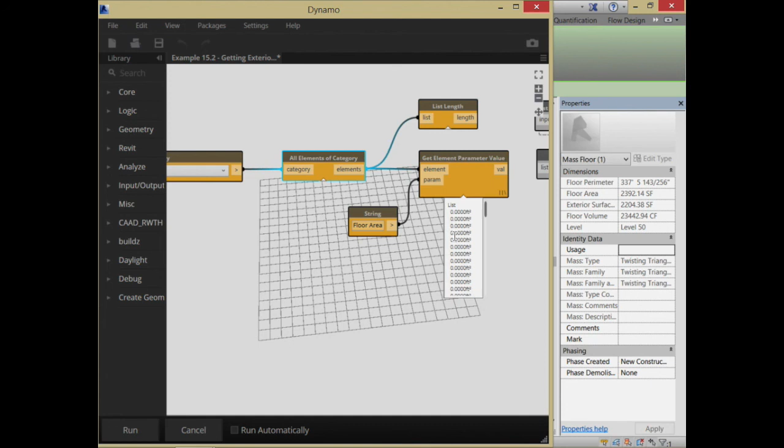So I have a list of 80 different values here. You'll notice many of them start with 0, and then they go on down from there. Actually, it looks like it's starting from the top of the tower and moving down, so the first whole batch of them are all just 0, 0, 0, 0, 0. That's because the top 80 through 50 or so just don't have anything there—there's no tower in that point. The tower only starts at like 50, so the top 30 or whatever just aren't being used right now. In fact, the top one is 51, so the top 29 of them probably aren't very useful right now.

In terms of going through and grabbing only the valid values, we can do this a number of different ways. If we just want to add them together, we could just take all those different values and add them—the zeros just don't matter to us. If I want to do something a little finer, I can go through and start doing some filtering. I could sort that, but that's not really all that consequential. Instead I can just take all those different values as a sequence and say, go through and find all the values greater than 0.

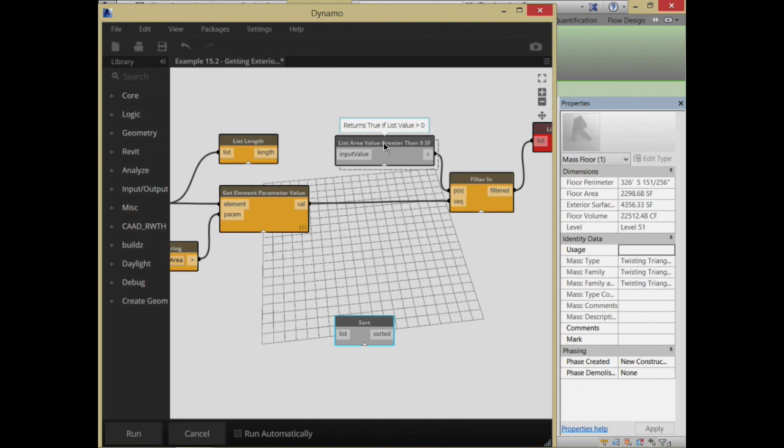So if I do that, let me take a look at what that node looks like. It's basically: if the input value is greater than 0, that's going to return true. When it gets done filtering, let's run that. Hopefully now we'll only have a list of valid values, not those other ones. So that list now only has 50 of them in there, and we can go through and sum that up if we like.

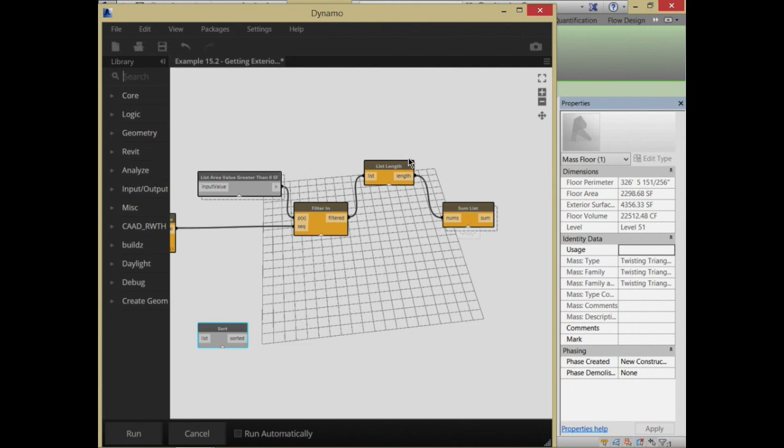Oh, that's list length—I don't want to sum the list length. I want to sum the filtered list. Okay, giving me about 218 in there.

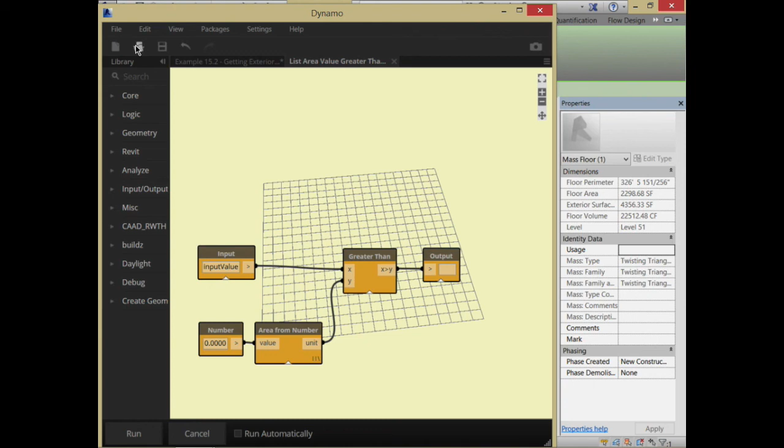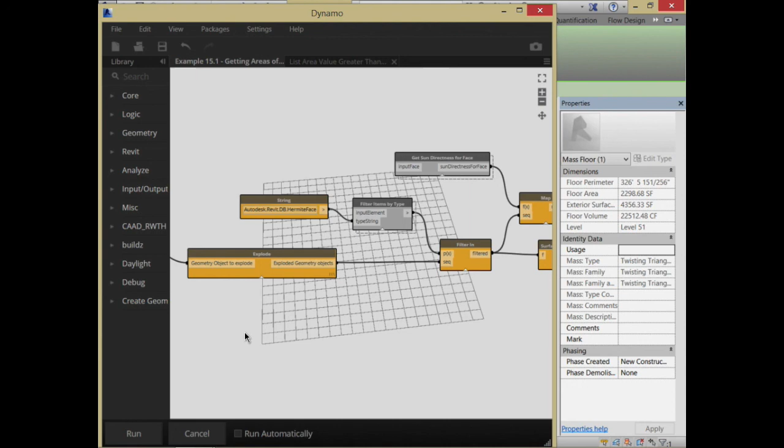Weird concept, but it's very central to a lot of this mapping and these functions. Whenever you leave one thing open and then apply a loop construct or some sort of function construct, it'll go through and try to evaluate it for each individual case, plugging in the values. Okay, good question.